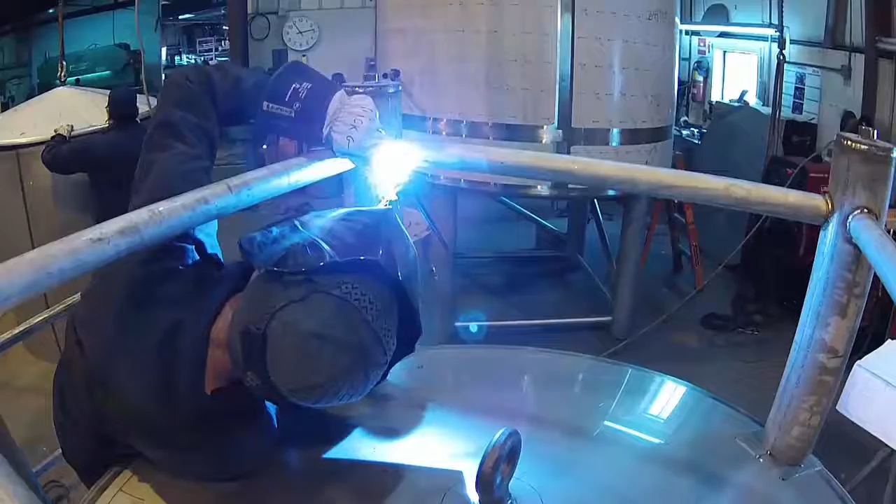I'm here at Upstreet Brewing today to talk about our glycol utility connections. This is a typical DME glycol utility diagram. For this example, we're looking at a 30-barrel unitank. You can see for this system, inside the brackets is the number of unitanks that are actually on the system. So in this case, there's 2.

Below that, we can see that the maximum load is 14,500 BTUs per hour. In brackets is the required glycol flow rate we need going through the jackets to get the cooling we need. So in this case, it's 5.2 gallons per minute. So that maximum load is the peak load that the unitank is going to see at any time during the fermentation or crash period. Right below that, we see the average cycle load, which is 9,200 BTUs per hour.

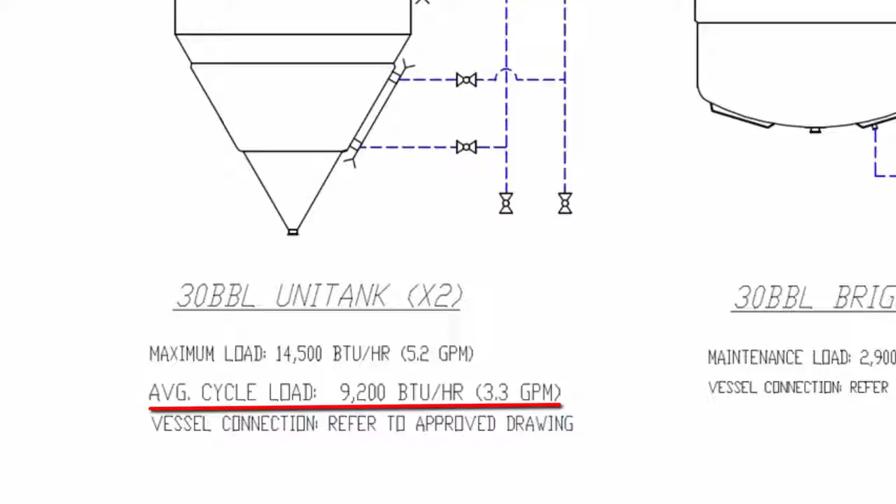That average cycle load is used to actually size the glycol chiller and is balanced over the full cooling demand of the fermenter. Since all your fermenters won't be calling for cooling at the same time, that just balances the loads for a more accurate sizing of the glycol chiller.

The vessel connections are indicated on the vessel approval drawings, so you can refer to your approval drawings to see what size connections are required there. All of the connection details are shown here along the side of the fermenter. Those details are sized by a mechanical contractor, but this gives a guideline for what is required to operate the DME equipment. So we have a supply header coming in.

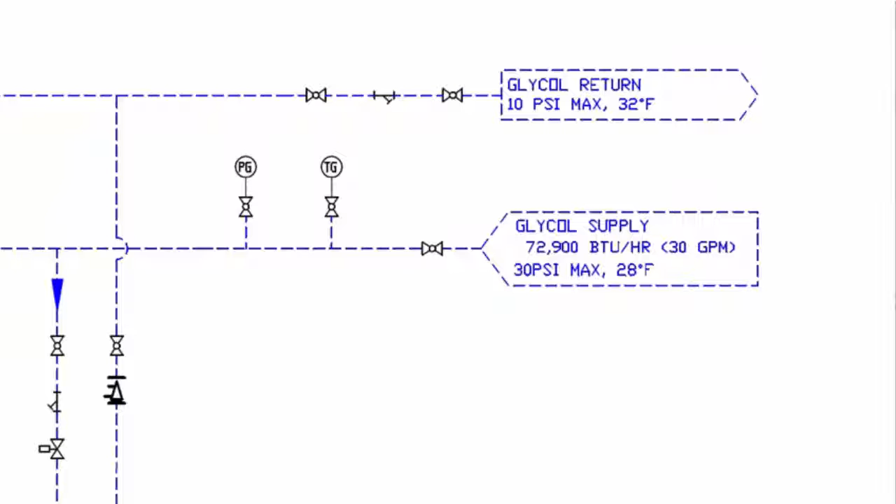That supply header needs to be supplying glycol at 28 degrees Fahrenheit to the vessels and needs to supply the vessels at a pressure no higher than 30 psi. The first component off the supply header is an isolation valve. That's just a ball valve that will shut off flow to the rest of the components if anything needs to be handled for maintenance. Right after that, we've got the inline strainer, which will strain out any small particles that come through on the header and keep it from clogging up our automated valves or our jackets.

Right after that, we've got our control valve. Now that can be a ball valve, a solenoid valve. There's many different options that'll be selected by your mechanical contractor. Following that, we have a pressure gauge. That's very important for troubleshooting any issues you may have with your cooling.

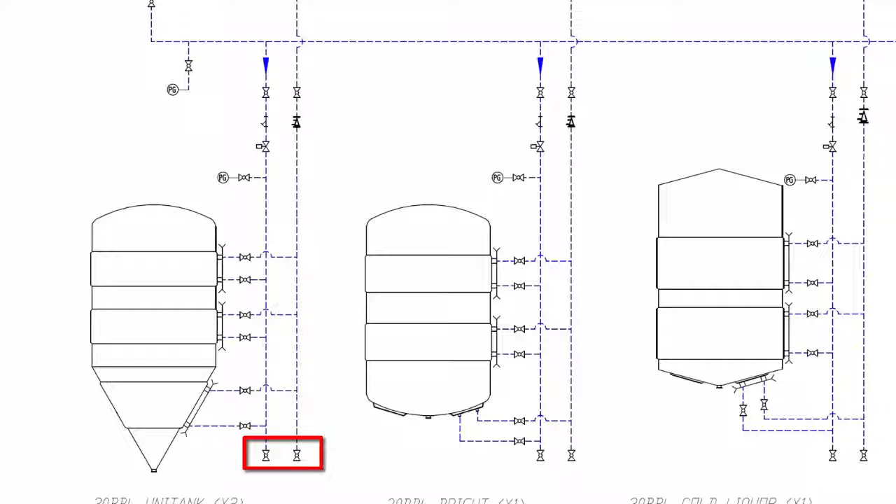And then we have individual isolation valves to each jacket. Now those isolation valves are used primarily if you're only doing part batches in the fermenter. If the fermenter is only half full, for example, you would use the isolation valves to turn off your top jacket. At the very bottom, we have drain valves, and that's primarily just for maintenance purposes.

On the return side, we have a flow balancing valve. This is one optional configuration. There's a few different ways to do that, and your mechanical contractor can determine the best way that they want to balance the flow for your system based on your layout. And then we've got another isolation valve before we go to the return header.

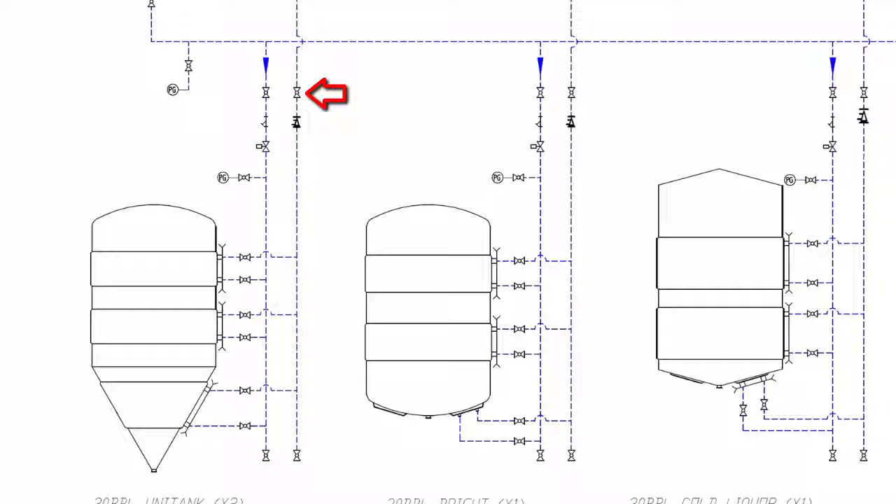Now it's important that the return header returns to an atmospheric tank. Our jackets are designed only for 30 psi pressure, so we don't want to put too much back pressure on the system. Also, between the supply header and the return header, there should be some means to bypass flow in the event that there's very low cooling demand in the cellar area. That will keep a small amount of glycol going through the headers and keep those headers cold.

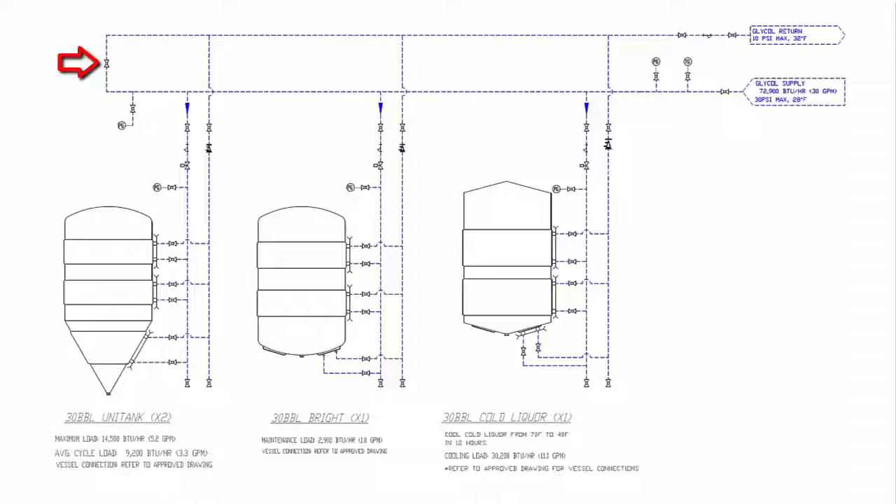So here we have the typical glycol connections on a fermentation vessel. This fermentation vessel has 3 cooling zones. We've got our cone zone, we've got our lower side jacket, and we've got our upper side jacket. So that upper side jacket can be turned off to isolate that top jacket whenever we're only partially filling our fermenter. And it's very important with a partially filled fermenter that we do turn that top jacket off, or we'll cause icing in the top of the tank.

So with the glycol connections, we always come in the bottom and we come out the top. And that forces any air that's in the system through and out that upper coupling and out the rest of the piping. In this particular install, they use George Fischer piping, which is one real nice way to install the piping. Not the only way, but it is a convenient means.

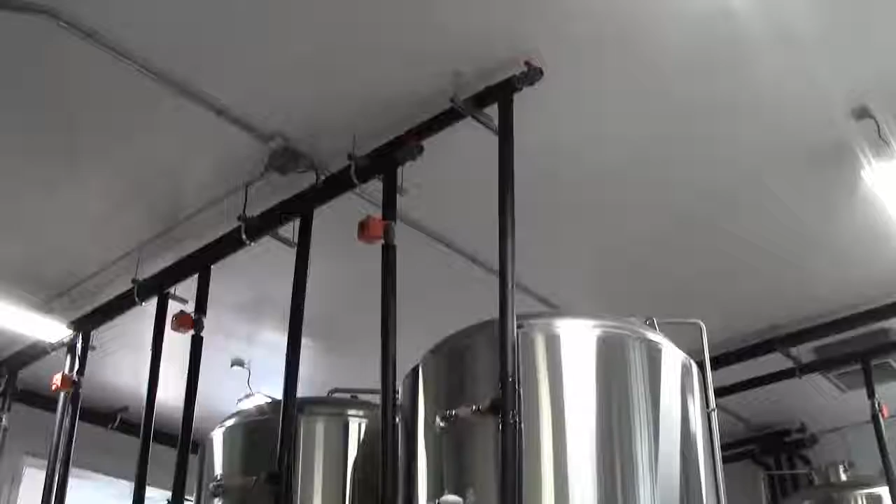Also, if we look up towards the top of this glycol system, we can see they have valves attached there, and those are for future expansion of the glycol piping. So that's one thing to keep in mind when you're initially laying out your piping, is what future expansion you may want throughout your cellar area.